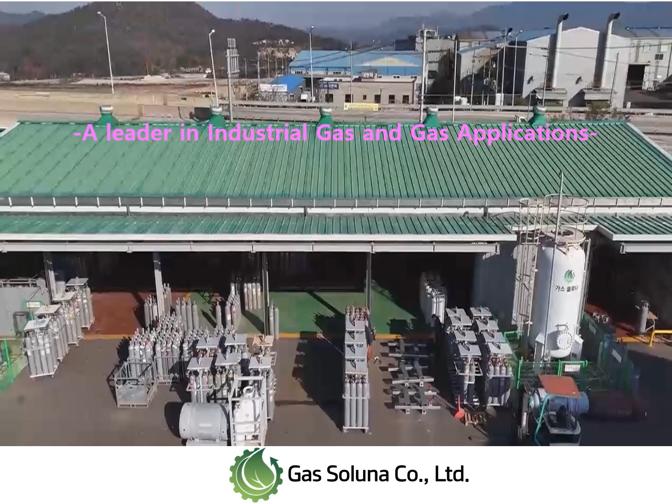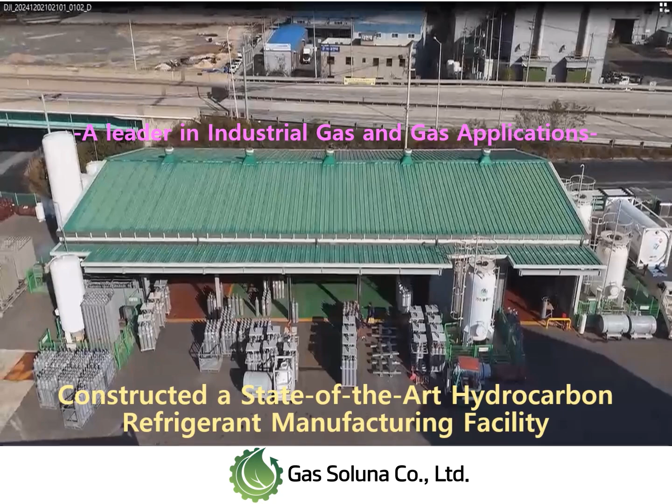Gas Soluna has established a reliable supply system by utilizing various domestic and international raw material sources and equipping facilities for storing and filling hydrocarbon-based gases and refrigerants. This enables the company to promptly respond to changing global circumstances and provide stable supply to customers both domestically and internationally. Gas Soluna has now become a leader in industrial gases and gas applications.

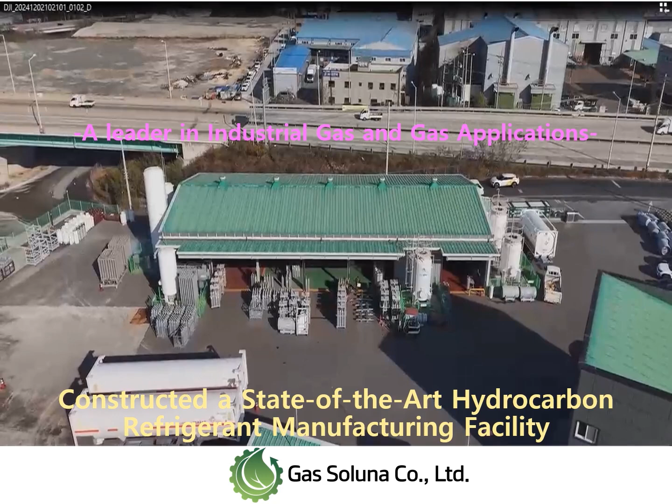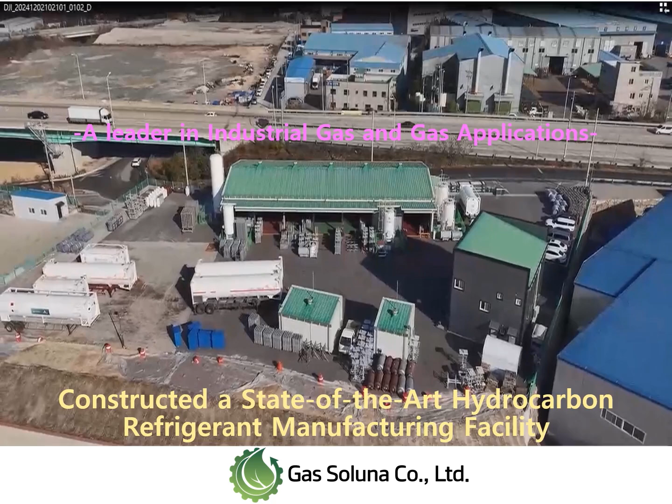The demand for eco-friendly refrigerants is rising, reflecting humanity's increasing efforts to reduce greenhouse gas emissions and protect the environment. This trend promotes environmental sustainability and presents significant business opportunities in the market.

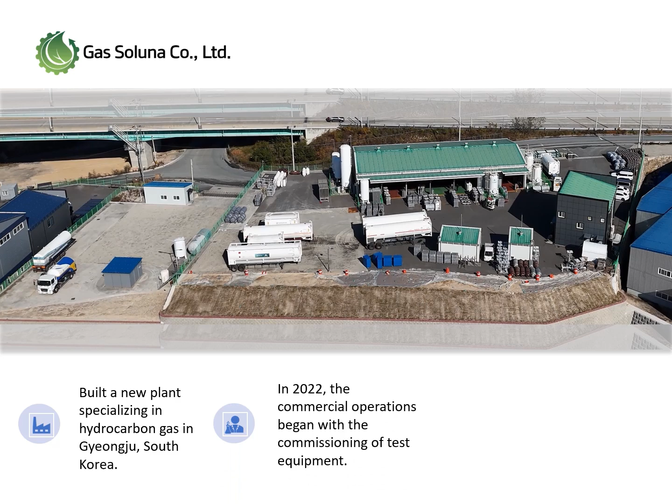Gas Soluna operates a cutting-edge hydrocarbon refrigerant manufacturing plant in Gyeongju, acquired from Modern Korea Co., Ltd. We obtained the necessary permits for hydrocarbon refrigerants in 2022 and have since commenced commercial operations, supplying customers both domestically and internationally in real time.

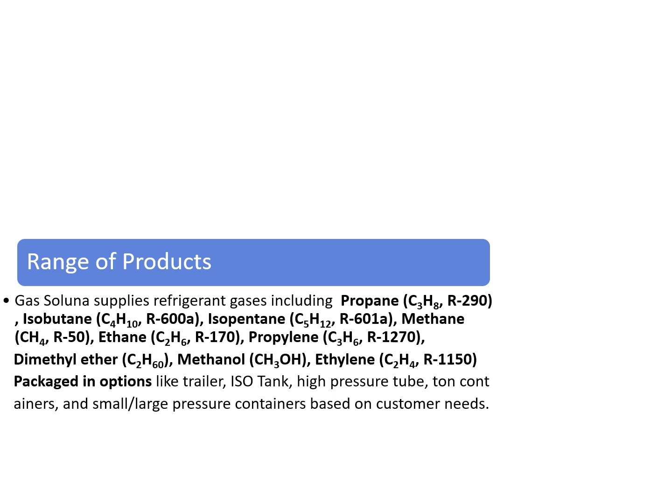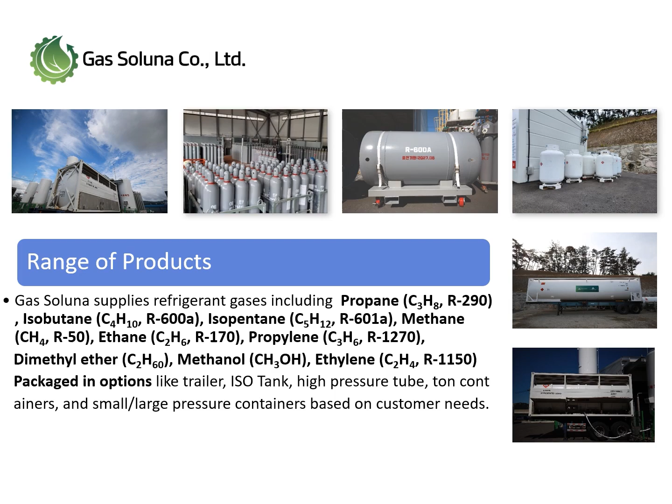Our company specializes in a wide range of hydrocarbon-based gases and refrigerants, including propane, isobutane, isopentane, methane, ethane, propylene, and dimethyl ether. These products are readily available in various packaging options to meet our customers' specific requirements.

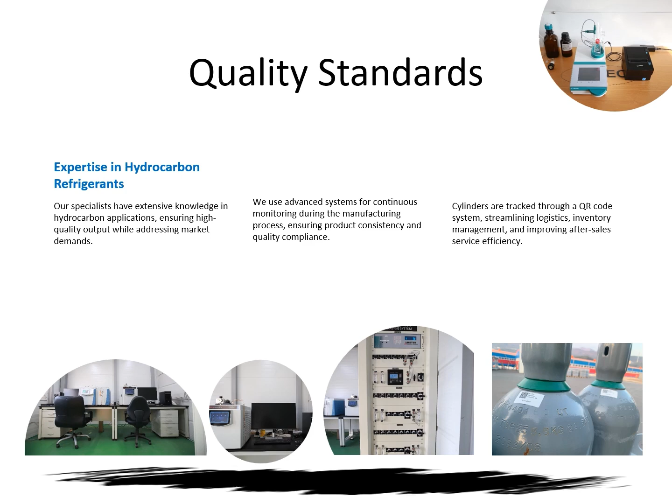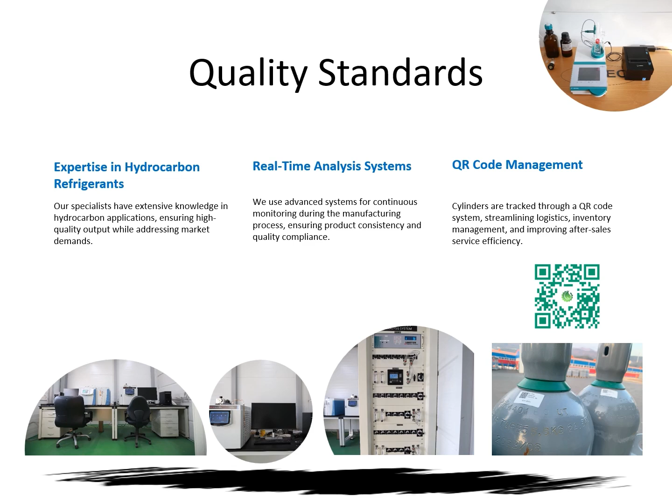At Gas Soluna, we employ trained experts in the hydrocarbon field and utilize advanced liquid gas hydrocarbon analysis equipment. Our real-time analysis system ensures high quality throughout the manufacturing and filling processes, guaranteeing premium gases and components. Additionally, we provide after-sales service to our customers by streamlining logistics and inventory management through our cylinder QR code system.

The export of mixed refrigerants for Babcock LGE LNG reliquefaction systems, combined with innovative technologies developed over 35 years of expertise, enables us to contribute to the advancement of key industries. These include cooling down tests for LNG carriers, bulk hydrocarbon supply for DF engine testing, and other critical applications.

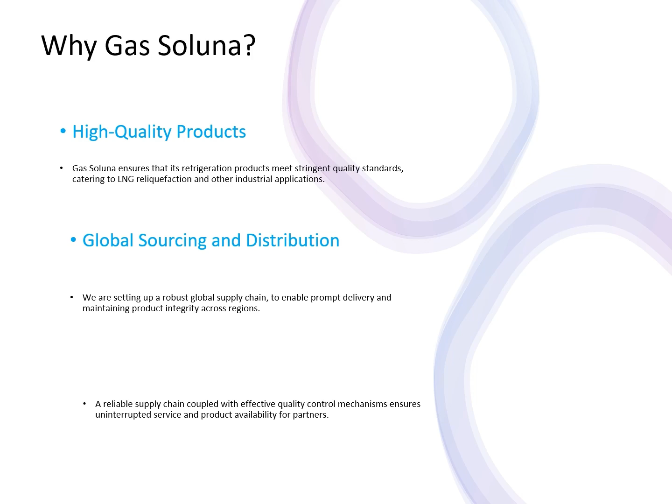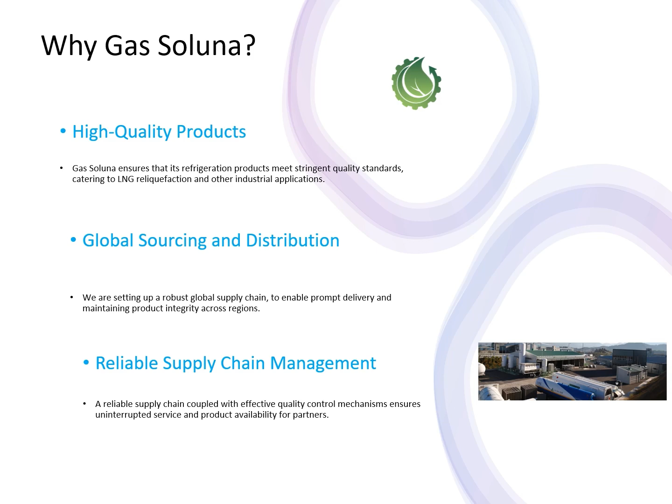We consistently supply complex refrigerants to Babcock's LNG reliquefaction systems by meeting strict international quality standards. We are constructing a global gas supply and distribution network to enable the swift delivery of gases worldwide. We are securing a reliable supply chain coupled with adequate quality control mechanisms.